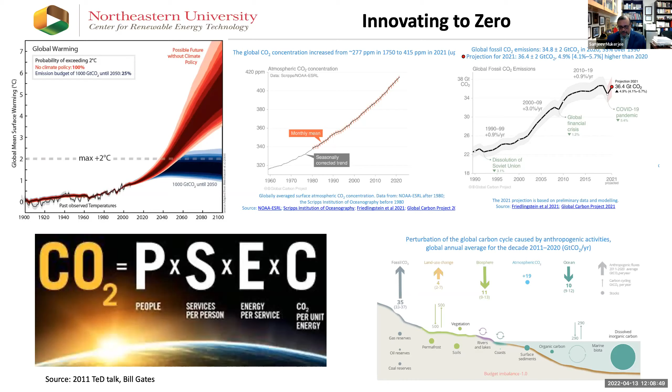As you can see from my next view graph and the one after this, all the renewable sources of electrons, we all know solar, wind, geothermal, hydro, and nuclear, out of which geothermal and hydro are essentially geographically limited. But solar, wind, and nuclear can be put anywhere. As you will see from my next view graph, nuclear is, however, very, very expensive at the moment and needs a lot of work to bring the costs down and, of course, improve its safety record.

But solar and wind have had an impressive record in terms of the price of renewable electrons. And I'll elaborate on that in the next view graph. But what we do here at Northeastern is take those renewable electrons and then translate that into society. And one of the best ways to do it, and actually the only principal way to do it, is using electrochemistry. And so our efforts have been basically divided into three thematic zones.

One is transportation and distributed power. The other one is carbon neutral fuels. And the third one is energy conservation. So these are basically the three themes on which we work. Of course, they're all based on electrochemistry and, in a sense, the electrochemical interface. And in order to make it happen, we use every aspect of electrochemistry there is.

That includes electrodeposition and dissolution, electrocatalysis in a very big way, redox chemistry, electrolyzers, and, as you see in your lithium-ion batteries, intercalation compounds. And that covers a whole range of technologies ranging from energy conversion to energy storage to electrolyzers to electrochemical pumps and energy conservation.

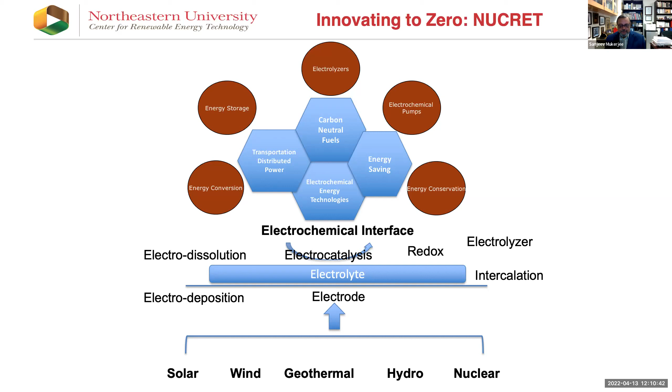And some of this gas increases because it's replacing coal very rapidly as the principal current state-of-the-art source of energy. Nuclear, in terms of its installed capacity, has remained constant, and that's always been a rather unfortunate thing, because whenever nuclear starts to get its due attention, some catastrophic event happens which brings it down politically to a no-go. The last one being the Fukushima incident.

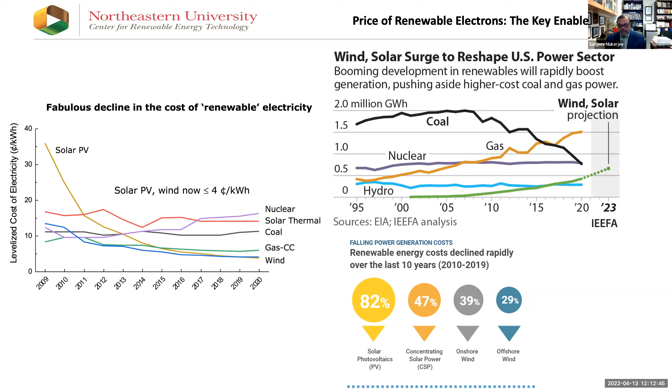Hydro has its own political issues, but I think hydro is one of the very attractive means, and there are still enough opportunities to exploit hydro to make a baseline power source happen. So with that, let me first talk about what we are doing at Northeastern, and that involves transportation and distributed power. We all understand transportation.

We've seen a rapid transformation from gasoline-powered internal combustion engines to battery-powered vehicles. That's happening really rapidly. Every single car manufacturer has got plans to make this kind of transition. Distributed power is the other thing which we haven't heard enough of, but is also very important. Right now, what we have in the United States is a 1950s-designed distribution of electricity across the country through centralized power generation and utilities which distribute this power across the length and breadth of our country.

But we've seen that with the advent of more and more catastrophic storms, we do have outages which are not in days, but are in weeks. I remember the Sandy storm, which happened almost 10 years ago, which pretty much put parts of New Jersey and New York out of power, and even Connecticut out of power for not days, but even the better part of a month. That is unheard of. And for those, we have to be resilient.

And one of the ways to be resilient is to use combined heat and power systems, which are community level power generation units. And these can be achieved through fuel cells. And we are working very hard to actually enable that. And for this, the fuel cell has to have a heat point, which is, in terms of temperature, around 150 to 250 degrees Celsius. That's the best usable heat in terms of exergy. And so that's what we are working on with companies such as Advent Technology Holdings, to bring it into reality.

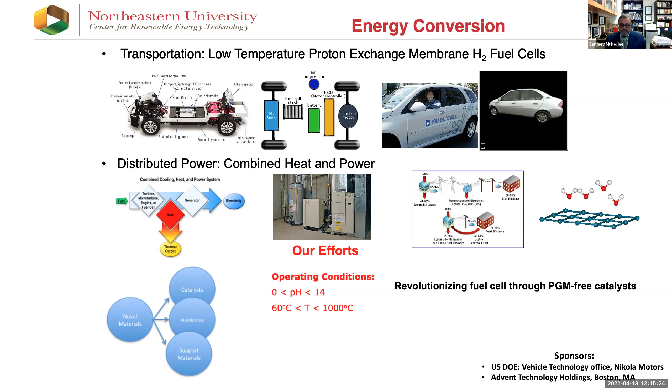Now, we've worked for the better part of 2 decades to try and bring the loading of these noble metals in fuel cells down. And actually, the current Department of Energy idea of enabling this is to replace the catalytic converters, which generally contain 5 to 10 grams of platinum, to actually have that same amount of platinum in a fuel cell, because once you have a fuel cell powered car, you don't need a catalytic converter, because your tailpipe will only have water vapor coming out.

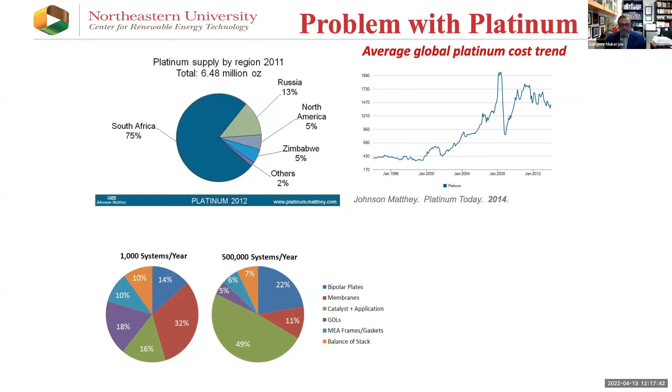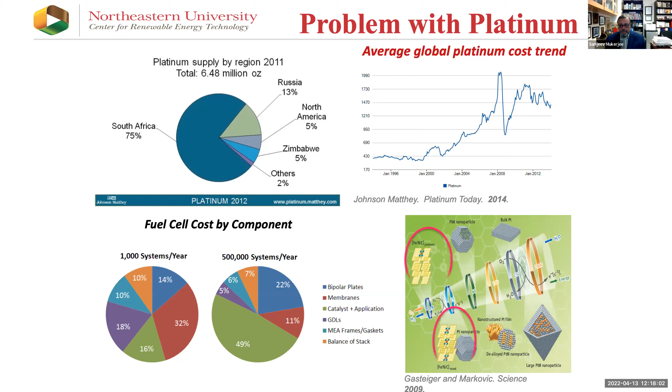So these noble materials are, in my opinion, unsustainable, and we have to go towards more sustainable materials. So designing these catalysts is a very important aspect, and we've been at the forefront of this for the better half of 2 decades and more. And so this is what we have paid a lot of attention to in our research group. And one of those things was that we were very fortunate to get a Department of Energy grant about 10 years ago, which allowed us to really be at the forefront of the drive towards more sustainable catalysts.

I won't go into details of all of this stuff on the view graph, but suffice it to say, we've been very successful at making what are called coordinated single atom catalysts, which are iron, nitrogen, carbon based systems. This was a team effort with us in the lead, but we also had many universities and a startup company which we helped form to scale up these catalysts. The startup company is still there and is the only company in the United States which makes fuel cell catalysts right now.

Every other company is a foreign company, most of them European or Japanese. So just to bring one of these things which is unique to us is this fuel cell performance. You can see current potential curves. This is the common way to exhibit a fuel cell performance, and you can see what we have achieved with this. This is a fuel cell operating at 200 degrees, which is the fuel cell for combined heat and power.

It uses a unique membrane, which is patented by one of the companies which we work with very closely, Advent Technology Holdings. And you can see that this fuel cell does not have any platinum at the cathode and shows remarkable resilience in terms of the durability as well as performance. We've been trying to develop this further into a product, and in the next couple of years, we're hoping we'd have a tangible product to demonstrate this technology with.

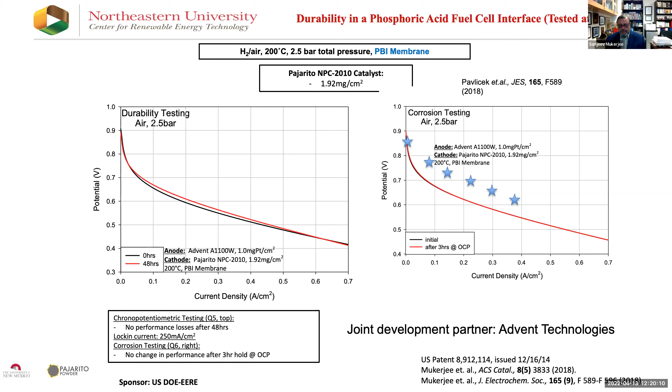The original sponsor, as I mentioned previously, was Department of Energy with their subunit called Energy Efficiency and Renewable Energy Division. The other thing which we do is energy storage, and in there we are working across the board into all the aspects of energy storage you can imagine. The thing we are working with in terms of conventional lithium-ion batteries is to transition from the current state-of-the-art solvent-based electrolytes. These solvent-based electrolytes, as I will elaborate later, are prone to catching fire.

And we have all seen, those who are interested in these batteries, that sometimes they can have catastrophic failure and lead to fires. And of course, that's not a very nice thing to happen, especially if you have these batteries flying in airplanes. And that's why there is always this safety question: do you have any batteries in your check-in luggage? The reason for asking that question is because of this. If you have badly made lithium-ion batteries containing solvents, well, they can catch fire.

So in order to mitigate that possibility, there are solid-state electrolytes, which we have recently been given a grant from NSF under the Industry University Cooperative Research Center. And in that, Northeastern has 3 partners, but overall we have 25 industrial partners across several universities which are participating in this effort. And we hope to have commercializable solid-state electrolytes coming out of this endeavor.

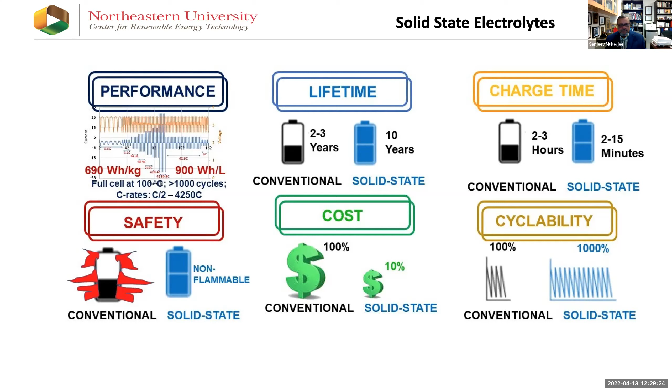So a word about lithium ion technology beyond the lithium ion batteries which we have right now. One of those is lithium oxygen. The attractive aspect of lithium oxygen is you don't have to carry one of the electrodes, because it is basically oxygen which is from air. So that's the attractive aspect. The other one, of course, is very high energy density.

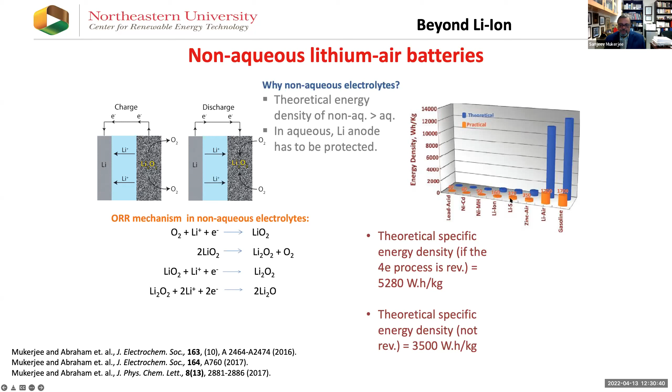So we worked for 10 years on this, and we hope we can continue to do this, because the promise is so much higher. But besides this, as you can see from this plot, we do have lithium sulfur, which is much better than lithium ion.

And so we have just embarked on a new project from the Vehicle Technology Office and Giner Incorporated, which is here in the Boston area, to actually improve the cycle life of lithium sulfur. And for that, we are actually using a combination of both advanced catalysis as well as additives to the electrolyte. These are fluorinated additives, which we hope to bring about and also enhance our fundamental understanding of how these systems actually work.

The other thing we are working very fervently on, and that's one of the mainstays of our efforts right now, is hydrogen generation through electrolysis, and of course, hydrogen pumps to actually purify the hydrogen. So you can have impure hydrogen on one side and three-nines pure hydrogen on the other side. We have made remarkable advancements in both of these. Let me elaborate a little bit.

So when you talk of electrolyzers, as far as the low temperature electrolyzers go, electrolyzers are not new. They're almost 100 years old. They started with the Norwegians and the Swedes utilizing the vast amounts of hydroelectricity they had to make hydrogen, and advanced metallurgy, which that allowed them to do. But the main problem with that liquid alkaline technology was that it couldn't go to high current densities and it was expensive.

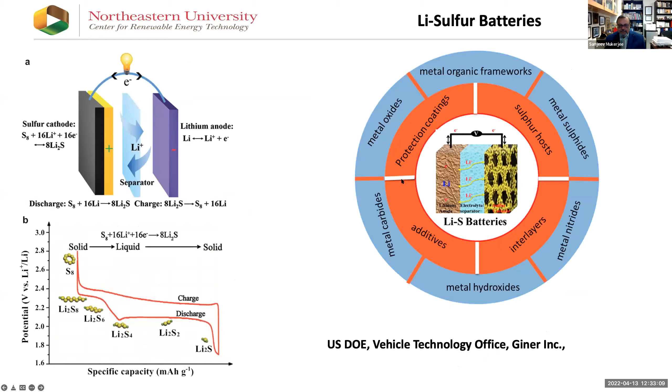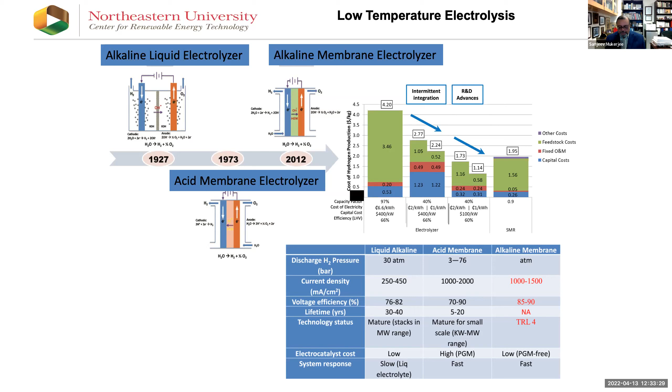So what we envisage is hydrogen produced at below $2 a kilogram, going to $1 a kilogram, in every gas station in the country, utilizing renewable electrons to do so. So that's the dream. In the histograms, as you can see, the green part is the cost of renewable electrons, which has obviously fallen. That is the biggest change and the game changer in this whole technology cycle. The other one is the blue part, which is the cost of the electrolyzer itself, and that has fallen because we don't require noble metals at all.

So here we are. This is our progression for the last 5 years. From the red curve to the purple curve is what we have achieved. And right now we are well below 2 volts at 1 amp per centimeter squared. I'll show you in the next view graph. We can actually achieve 3 amps per centimeter squared, not in a sustainable way, but at least for spikes, for meeting urgent demand and things like that.

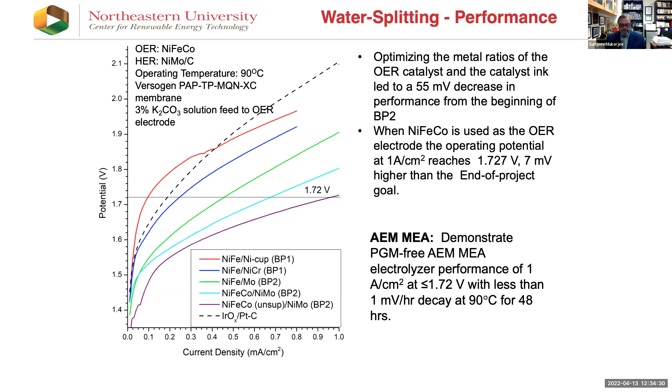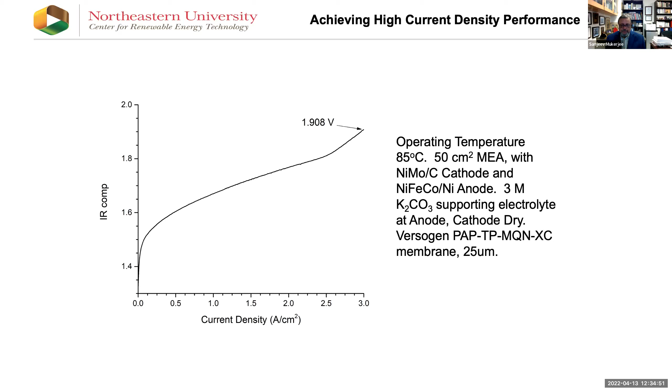If you compare this to the noble metals, which is the dashed black line, we are doing much better than that. So we are well on the way to using completely noble metal free alkaline electrolyzers, where the hydrogen is produced almost dry at three-nines pure level. This is the one which we recently have below 2 volts at 3 amps per centimeter squared. And it's remarkable that we can actually do that. We are world leaders in this performance. And right now we are in a hurry to file as many patents as we can in this area, as well as publications.

The last thing I will mention is energy conservation. One of the things which I'd like to highlight is chlorine production. It doesn't sound terribly exciting, but chlorine actually takes up almost 2% of any developed country's electric output, including the United States, which in 2017 numbers was 87,600 gigawatt hours per year. That's a lot of electricity. And there are 2 primary technologies involved here: chlor-alkali systems and hydrochloric acid electrolyzers or recovery systems.

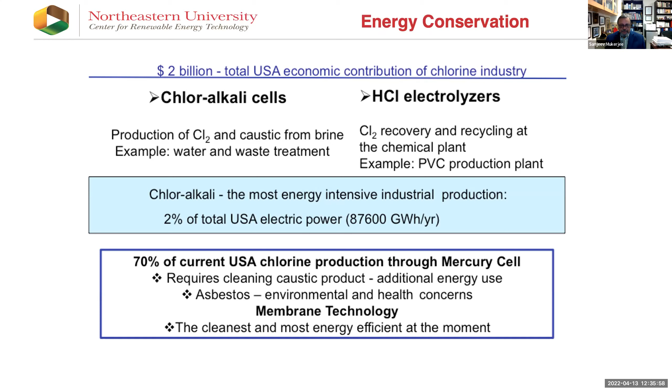Hydrochloric acid is a particular case in point because hydrochloric acid is produced in a lot of chemical plants. The hydrochloric acid emitted from these plants is actually dilute hydrochloric acid with a lot of organics mixed in it. Nobody wants that. It's very expensive to get rid of. So the technology we are talking about is what is called oxygen depolarized cathode technology, where we have replaced the hydrogen evolution electrode with an oxygen reduction electrode. Both of them are reduction.

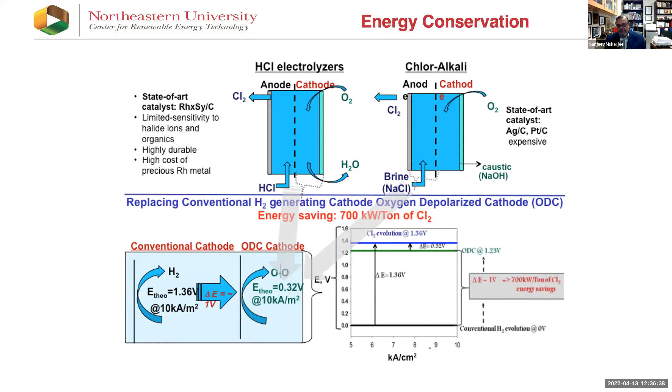And actually by doing that, we can save 1 volt out of a 1.36 volt process, which amounts to about 700 kilowatts of energy per ton of chlorine. That's a lot of energy savings. That's what we've been able to achieve. The current state of the art, especially in terms of hydrochloric acid technology, is rhodium sulfide. And in the beginning of my talk, I mentioned it's $28,000 per troy ounce.

And that's why we have patented. There are 2 US patents which we just got a few years ago, which show that we don't need rhodium, and we are able to do the same, actually better, 20 to 40% better in terms of energy using our iron, nitrogen, carbon catalysts. It's amazing that these catalysts are stable, because in the hydrochloric acid case, we are using 5 molar hydrochloric acid. So that's an amazing aspect.

So right now we are working with De Nora North America to actually prove that this technology works. And if it does, it's going to be a commercial product in the future. The last thing I'll mention here, in all of the effort in materials development which I showed you as I moved along, is our ability to do advanced spectroscopy and computation.

And you can see we use a vast variety of spectroscopic tools, some of which are more mundane, such as the electrochemistry tools, but some of which are amazing tools available through the Department of Energy user facilities, such as the synchrotron light source. Here is an example. This is the Advanced Photon Source, which we have been using for doing really the transient spectroscopy. We also do steady state spectroscopy, all in situ, while we are changing currents and potential in our cell.

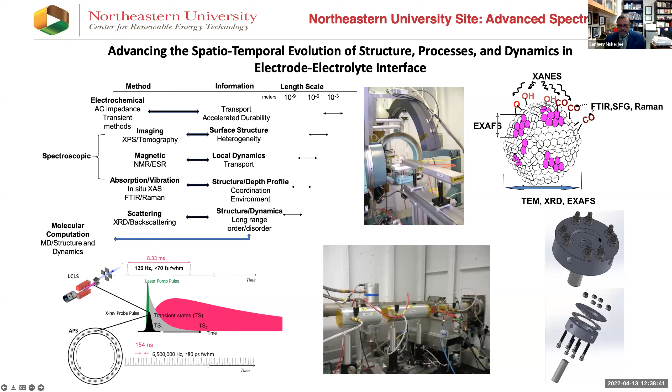An example of such is shown here. These are very, very high power X-ray sources. So these are actually inside lead lined chambers. And some of the pictures are shown here just to show you how these are actually conducted. And some of our cells which we use for doing spectroscopy are also shown here.

In our effort to actually advance all of this, we work very closely with national labs. We have very close relationships with Los Alamos, Brookhaven National Lab, where we are using the synchrotron light source, National Renewable Energy Lab, where we work very closely in terms of the translational aspects of our technology, and Argonne National Lab, where the Advanced Photon Source exists. We also have many universities which we have been working with, a lot more than what I have in this view graph. These are our closest partners in the efforts which I just outlined.

We also have worked with a lot of companies. We continue these efforts. We just finished a program with Ford. We worked with General Motors and so on. Too many to actually mention here. But I will show you some of the successes we have in terms of startup companies. This is also a global effort. If you look at all our publications in the last 10 years, they've been publications with collaborations across the globe. Some of these institutions are mentioned here.

What I don't have here is our close collaboration with Israel. I am on the board of INREP, which is the Israel National Research Center for Electrochemical Propulsion. Of course, we haven't met in the last 2 years because of COVID, but I really look forward to the efforts happening there. But since it was getting too crowded, I somehow didn't mention that.

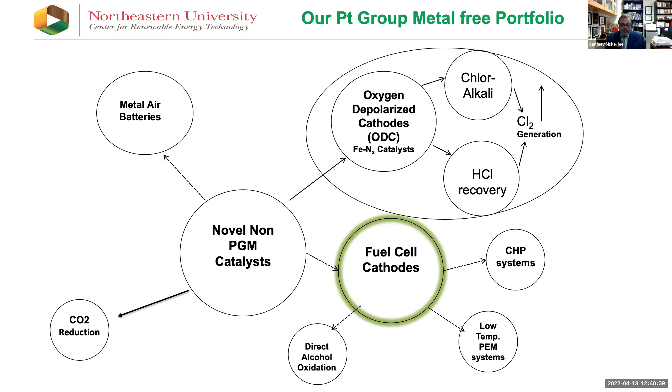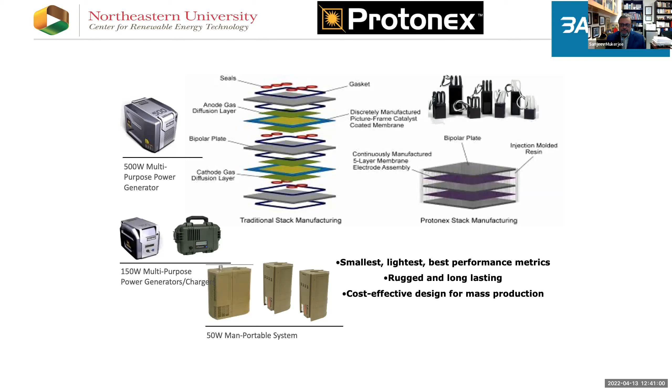We have a vast portfolio of patents. I can elaborate on that in the question hour session if the question arises, both in the platinum group metal free area as well as the platinum group metal based systems. There are many startup companies which we helped found. I'm not the founder, I have to say that right at the outset, but I helped in a very big way to bring them about. One of them is Protonex, which makes fuel cells for the military. It's now owned by Ballard Power Systems.

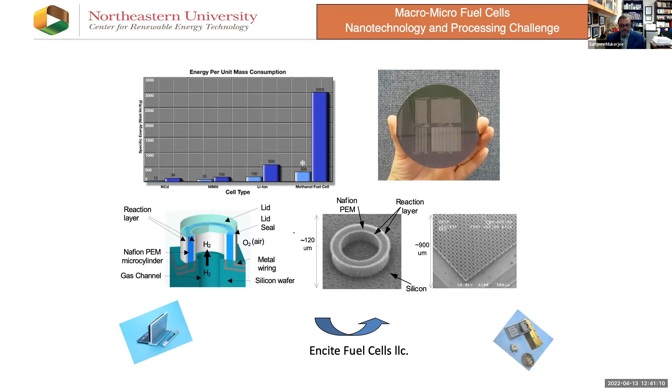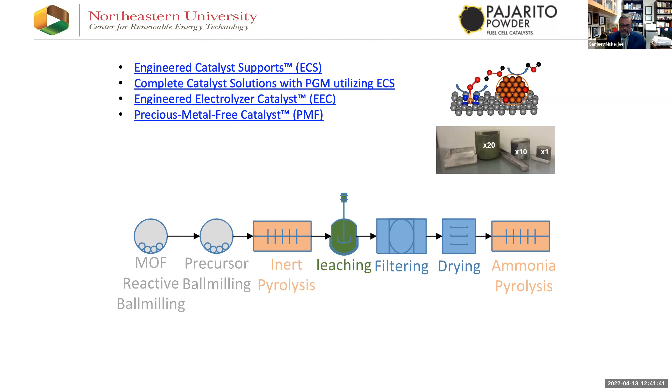Another one which was not successful was to make microfuel cells. I was most excited about this, but there were no takers for this. And so amazingly enough, it ended up in another startup company called Encite, which is trying to develop some of the technologies which we developed for the microfuel cells for CPAP disposable systems. We do have catalyst companies like Pajarito, where I'm not a founding member, but one of the members of the advisory board, and actually they were the first customers of my program.

And the last one is Advent Technologies Holdings. This is the company which is trying to develop fuel cells for trucks, combined heat and power systems, as well as hydrogen electrolyzers. And with that, I will finish my talk, and hopefully there are questions.